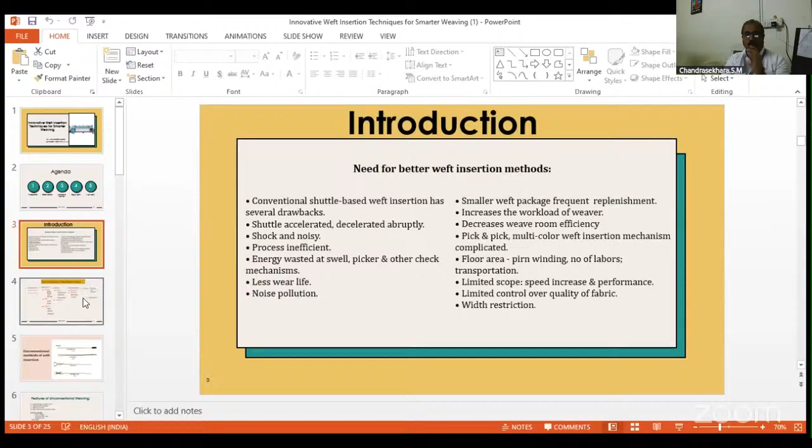So that's why people thought, why can't we design the loom with no shuttle? That idea came to the minds of these scientists, and they came up with a new solution - what is called the shuttleless loom, or the loom with no shuttle. This is the introduction of shuttleless looms into the textile industry. It is a major breakthrough, I tell you.

In the 1950s, with the great effort of the Sulzer brothers of Switzerland, they came out with a new solution called the projectile loom. The projectile loom is the first category introduced into the textile market under the shuttleless concept.

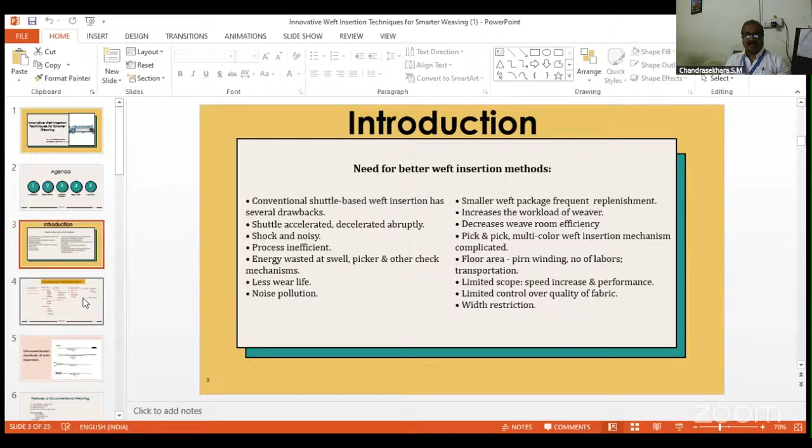Let us go in detail into the shuttleless loom. Before that, I'll go through the classification of shuttleless looms. The first kind of generation loom is the projectile loom, in which the single projectile was first started.

When they started with the single projectile loom, the projectile had to be inserted into the shed, go to the opposite side, leave the weft, and come back to the picking side. This caused great wastage of time, so they introduced multiple projectile looms, using a number of multiple projectiles.

In multiple projectile looms, the number of projectiles is decided by the width of the loom. Likewise, 5, 6, 7, or 8 projectiles are used in multiple projectile looms.

The next category of shuttleless looms are called rapier looms. There is a big classification in the rapier loom. Rapier looms are classified on the basis of number, on the basis of weft, and on the basis of rigidity. On the basis of number, the rapier looms are classified as single rapier.

They first tried with the single rapier, but a lot of time was wasted, so they introduced the double rapier. Then they went for the twin rapier, and then the biphase rapier. I'll discuss these briefly in the next slide.

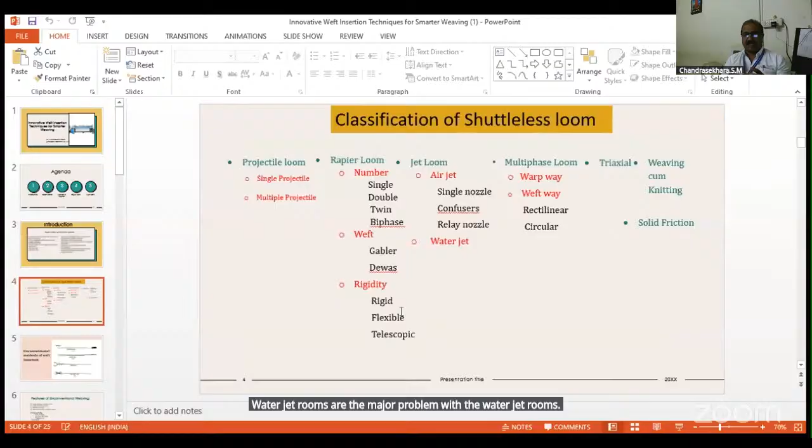Another kind of jet loom is called the water jet loom. The major problem with water jet looms is that they are restricted especially to hydrophobic yarns like polyester, because they are not recommended for cellulosic materials. This is because the whole media is water, so the cloth may absorb water and become wet.

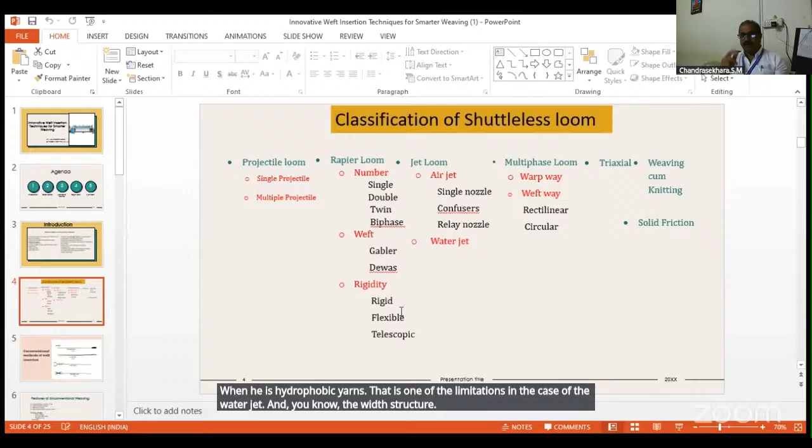That's why water jet looms are restricted to hydrophobic yarns only. That's one limitation in the case of the water jet, along with width restriction. In the case of the air jet loom, first they tried with 230 centimeter wide fabric. Now by introducing confusers, relay nozzles, and multiple jets, they have achieved wider widths in the air jet loom.

Next comes the multi-phase looms. Multi-phase looms are very popular for higher production rate. Believe it or not, multi-phase looms have gone up to a speed of 5,000 meters per minute.

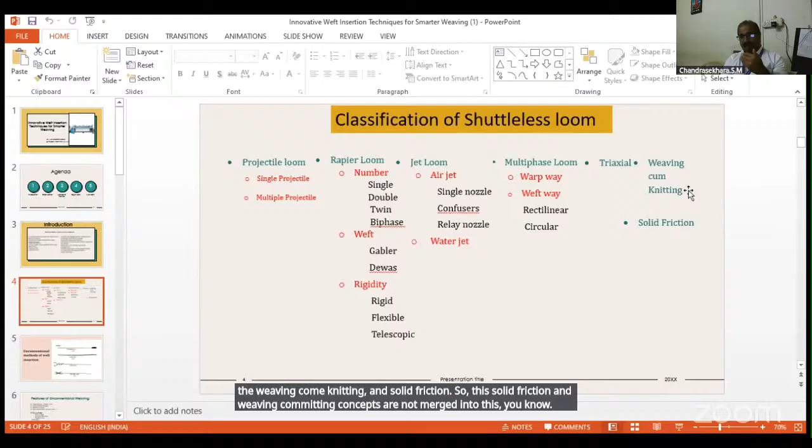The classification is warp way and weft way. In the case of weft way, there are rectilinear and circular kinds of multi-phase looms available. Next comes triaxial, and then weaving cum knitting and solid friction. These solid friction and weaving cum knitting concepts are not much introduced into the market yet; they have yet to be popularized.

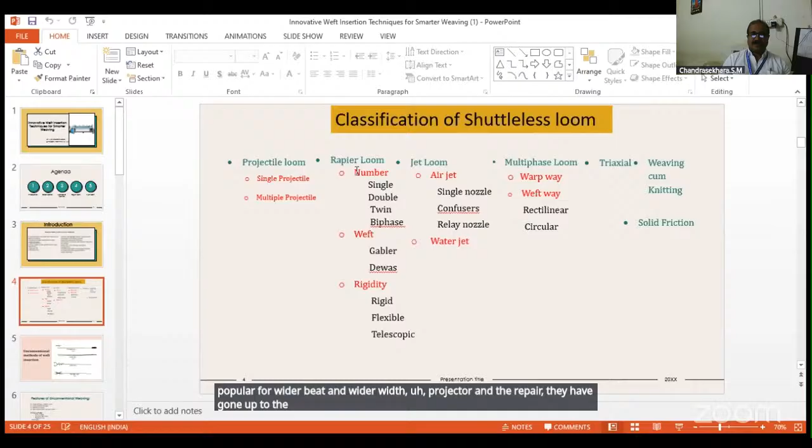But the rest of the shuttleless looms, like projectile and rapier, especially projectile looms, are very popular for wider width. Projectile and rapier have gone up to 5,000 mm, even 5,300 mm wider width cloths are possible using projectile and rapier. So this is the brief classification of shuttleless looms.

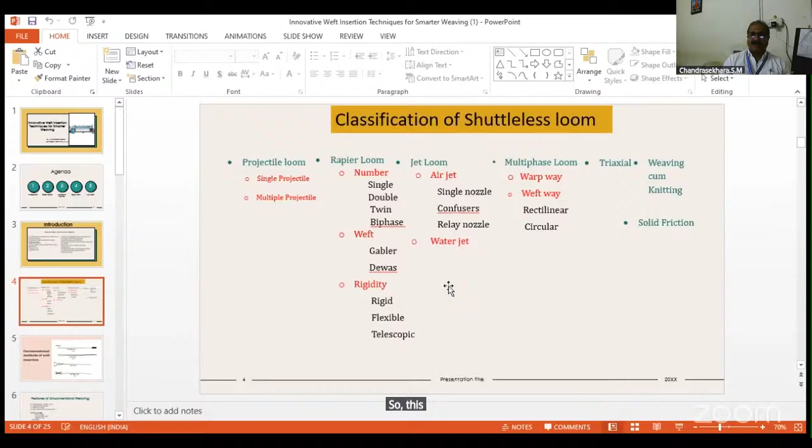There are two methods as mentioned already: one is the loop transfer technique, called the Gabler system, and another is the tip transfer technique, called the Dewas system. Anyway, the transfer takes place at the center of the loom. In the case of the double rapier, this is the beginning of it.

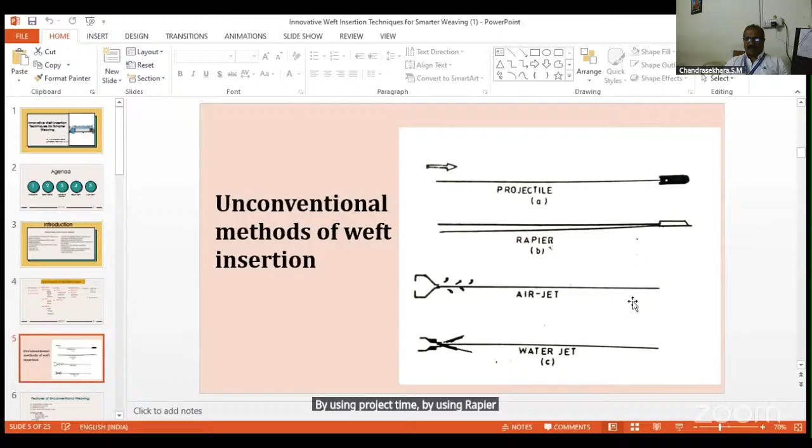Because of all these accessories in the recent edition, they have achieved wider width fabric in the case of the air jet loom. This is what is called the water jet loom, where the pressure created by the jet pump carries the weft yarn across the shed. These four diagrams show the different types of weft insertion methods: using projectile, using rapier, using air jet, and using water jet.

So here I'll just go through this: what are the features of these unconventional weaving machines, and how they differ from the conventional weaving machines.

First, unconventional weaving machines carry a large weft package like the cone or cheese, containing a huge amount of weft yarn, which can supply the weft yarn for quite a long period. The cheeses or cones weigh nearly about 5 kg to 6 kg, so they can continuously supply the weft yarn. That is the advantage, the important feature of unconventional weaving machines.

Next one is unconventional selvage.

As in the case of the conventional selvage, we have continuous weft insertion by the shuttle. The loop kind of selvages are formed in the conventional one, whereas in the case of unconventional selvages, there are different types: tuck-in selvages, leno selvages, fused selvages, melt selvages.

Different types of selvages are made very attractive near the edges. Manufacturers can go for monogramming, blend composition details, or company names printed on the selvage. Such beautiful, attractive selvages are formed on recent unconventional shuttle-less looms. Next is the weft accumulator.

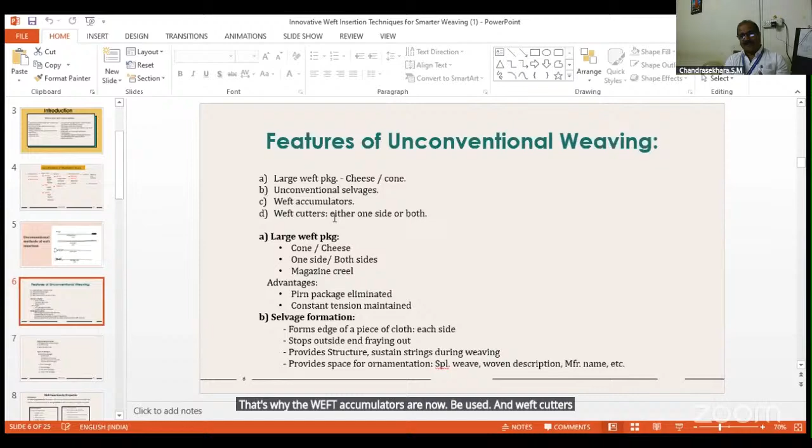Weft cutters are sometimes provided at both sides of the loom, or at one side. So these are the important features of the unconventional weaving machine.

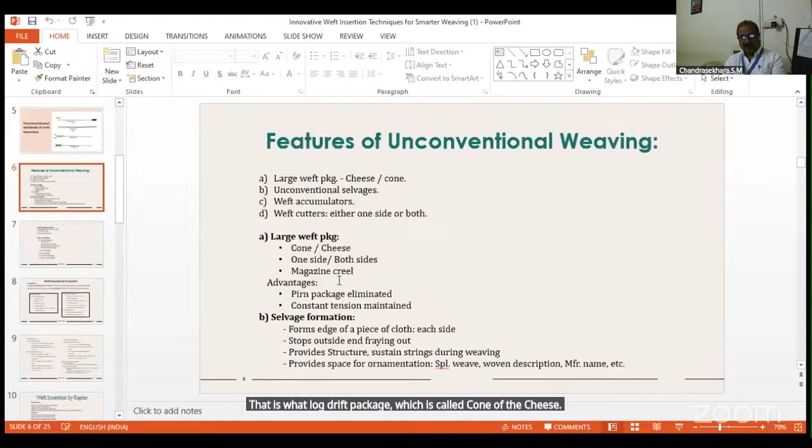That is, the large weft package called cone or cheese, sometimes provided on one side or both sides. They are also provided with a magazine creel, where each package position is duplicated. Thereby the weft can be supplied for hours, shifts, or even days together by using the magazine creel. That's the advantage of the large weft supply package like cone or cheese.

And the whole pirn-winding department is eliminated. The people required for pirn winding, the machinery, transportation, and chances of weft mixing are all completely eliminated. This way you can increase efficiency and get good quality fabric, because when the pirn is exhausted and changed, there are chances of variation in pick density due to the change of weft pirn.

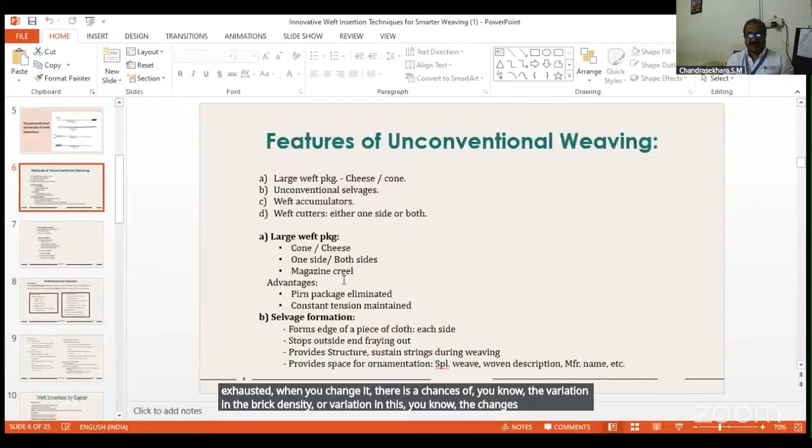So that's what I've just mentioned. Constant tension is maintained because of the weft accumulators, and very attractive selvages are formed using modern unconventional shuttle-less looms.

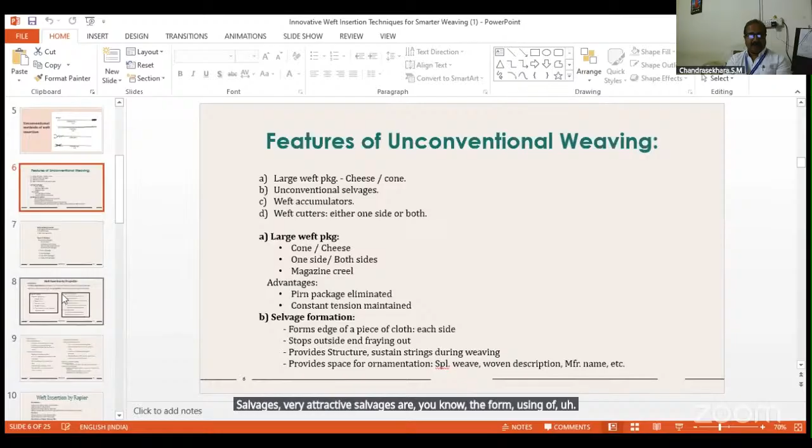I'll move on to projectile looms. The projectile looms were introduced into the market by Sulzer Brothers in the year 1953, in Switzerland. The projectile looms revolutionized the weft insertion technique completely, using a projectile to insert the weft yarn through the warp shed.

In the case of projectile looms, just imagine the projectile dimension is 90 mm. What we have to observe is that the shuttle, weighing more than half a kg and used to carry just a few milligrams of weft, is reduced to a projectile weighing 40 grams. Where the shuttle is almost one foot in length, the projectile is reduced to 90 mm.

The width of the projectile is also 14 mm and the thickness is 6 mm. By observing these dimensions, to a greater extent the projectile size is reduced compared to the conventional shuttle. Because of this reduced weight, the projectile is able to pass through the shed with greater velocity.

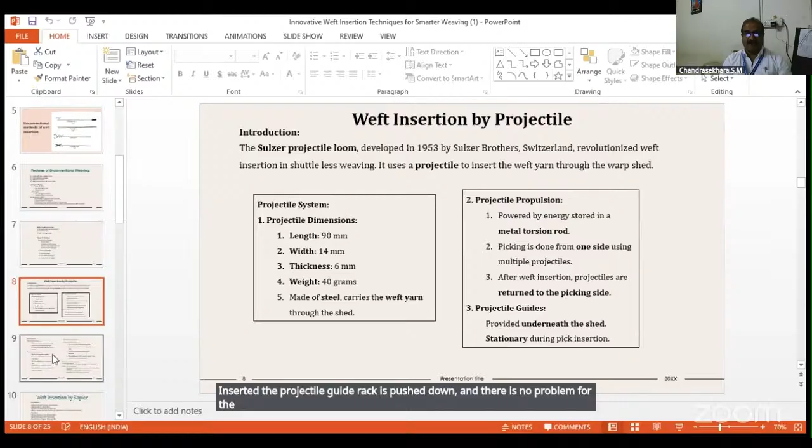Once the pick is inserted, the projectile guide rack is pushed down, and there is no problem for the beat-up mechanism. So in the case of the projectile loom, let's go through the weft insertion mechanism.

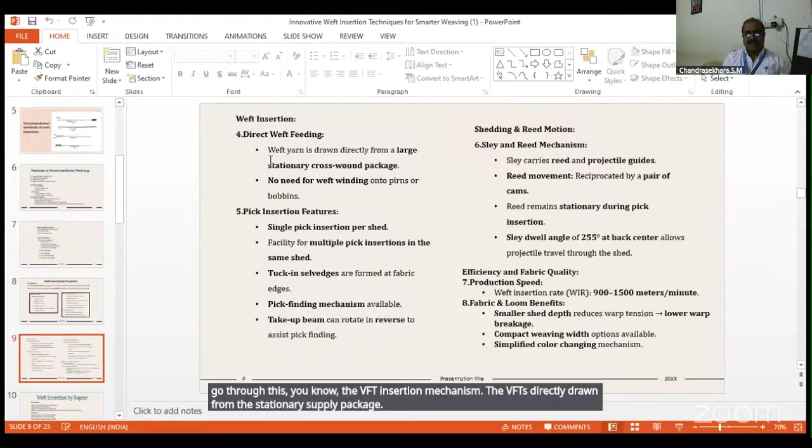The weft is directly drawn from the stationary supply package and introduced into the shed, with no question of any department required here. Directly the cones or the cheeses are used as the weft supply package. It may use a single pick, or multiple projectiles, and facility for multiple picks in the same shed is also possible.

Tuck-in selvages: please understand, projectile looms are very popular, especially for making tuck-in selvages. Let's see how these tuck-in selvages are formed.

When the weft is inserted at both sides, a small amount of weft is protruded, say 10mm on this side and 10mm on that side. That extra weft which is introduced is held by the tuck-in needles and introduced into the shed when the next shed is open. Strong, neat, attractive selvages are formed using this tuck-in concept.

Another feature of this projectile loom is the pick finding mechanism. If there is any fault in the weft, any fault in the pick, the loom is allowed to run back one or two picks. You can repair it and then run the loom. That is what is called the pick finding mechanism.

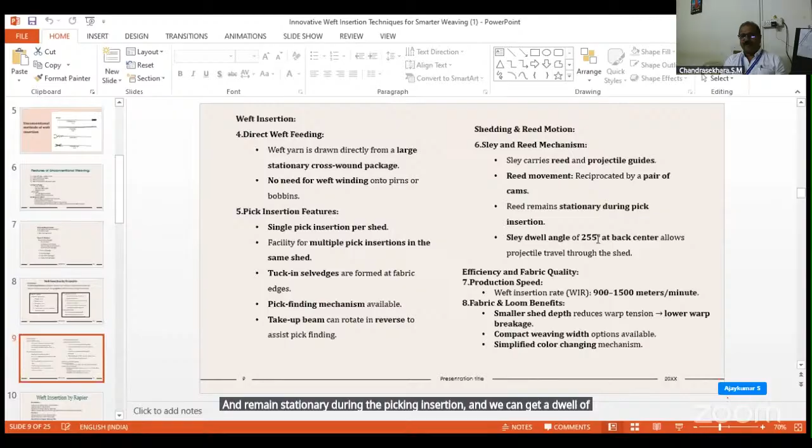The reed is reciprocated by a pair of cams across the complete width, and the reed remains stationary during the pick insertion. We can get a dwell of 255 degrees at the back center, so we get a lot of dwell period at the back center of the loom.

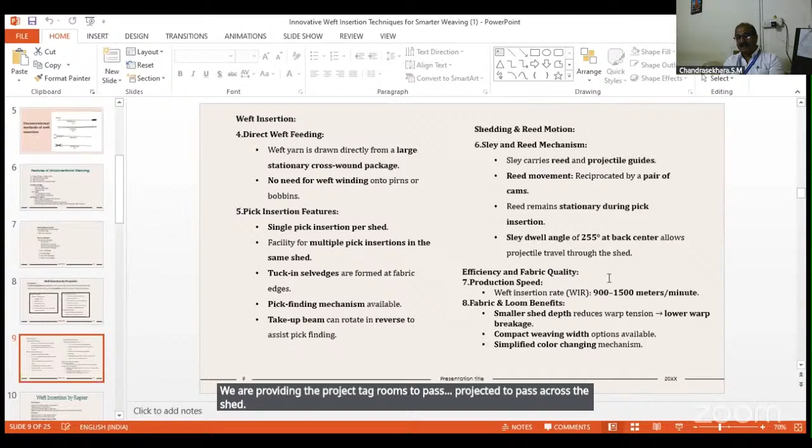That means we are providing the projectile time to pass across the shed. Greater time is given for the projectile, which is why greater picks per minute are possible. We can design the reed according to our requirement, so we can get 255 degrees dwell at the back center.

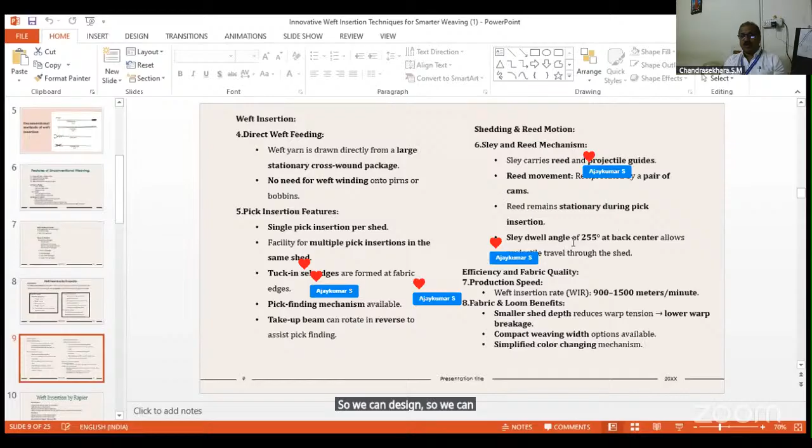Production speed: the weft insertion rate is 900 to 1500 meters per minute. So a greater weft insertion rate is available, and this additionally increases the efficiency and production.

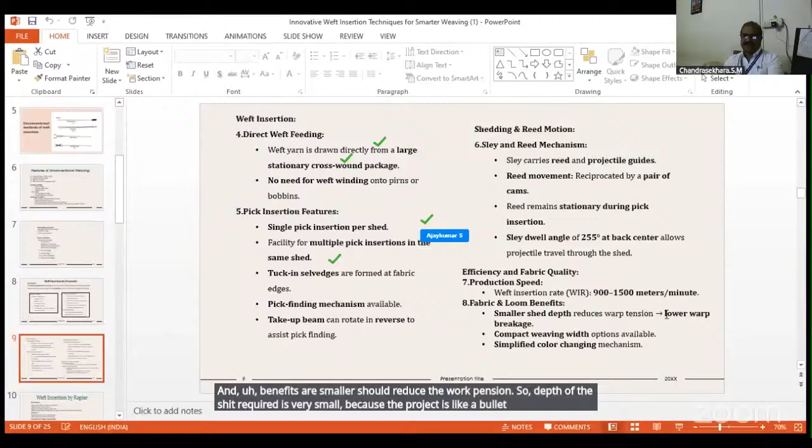Benefits include smaller shed depth, which reduces the warp tension. The depth of shed required is very small because the projectile is like a bullet which carries the weft yarn across the shed, so it does not require any heavy shedding mechanism.

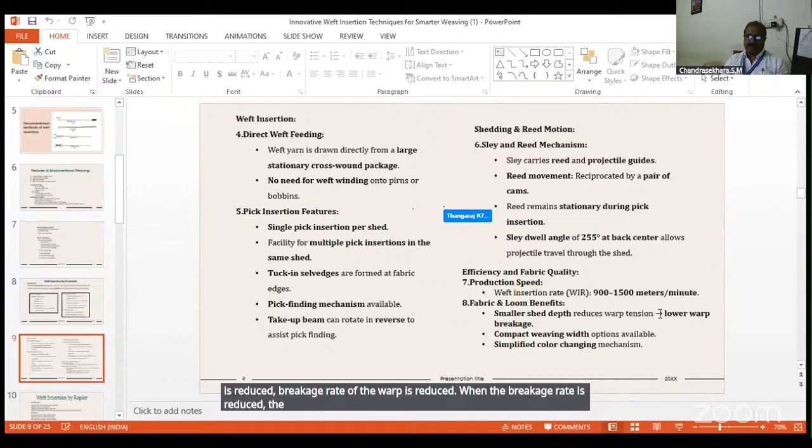That's why the strain on the warp is reduced. When the strain on the warp is reduced, breakage rate of the warp is reduced. When the breakage rate is reduced, stoppages of the loom are reduced. When stoppages of the loom are reduced, weave room efficiency is increased, and the reduced breakage rate leads to good quality cloth.

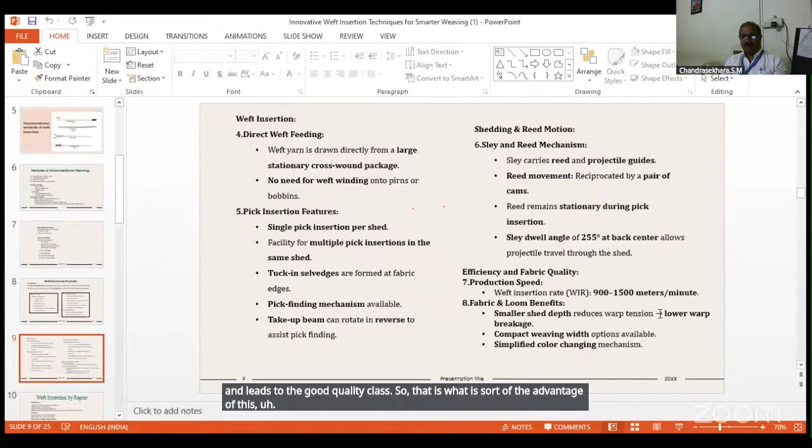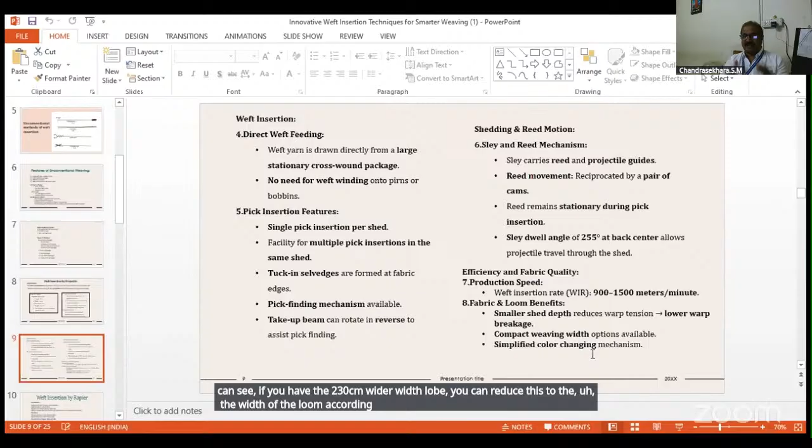So that is the advantage of this projectile loom - compact weaving width options are possible. If you have a 230 centimeter wide loom, you can reduce the width of the loom according to requirement. That facility is available; that is one advantage.

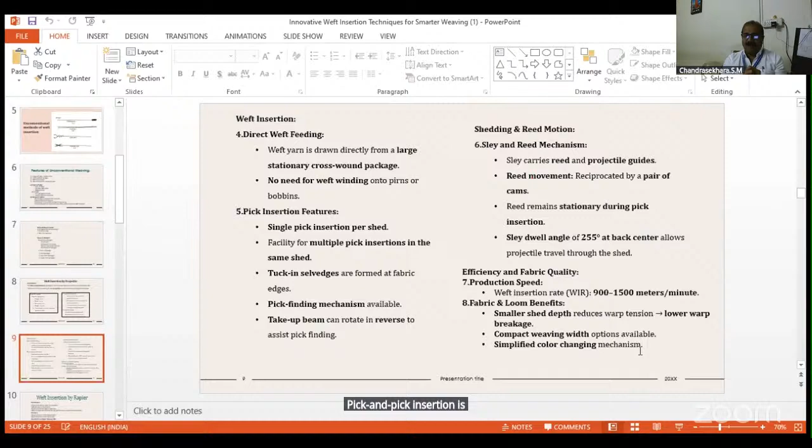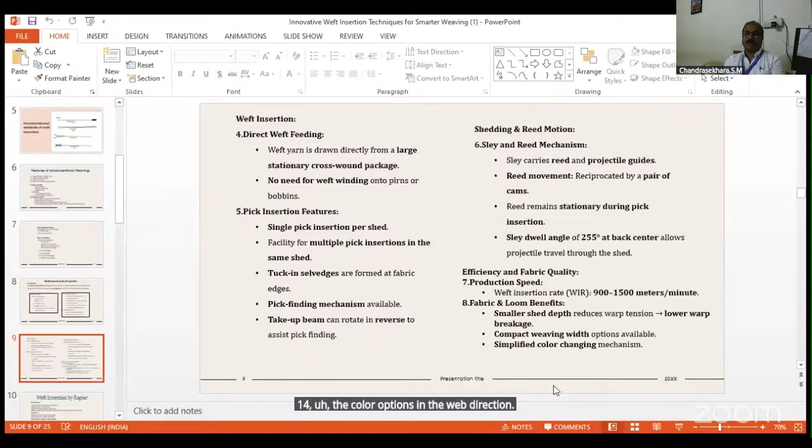Simplified color changing mechanism - I mentioned this when comparing with shuttle looms. There, the picking mechanism and color changing mechanism, that is pick and pick insertion, is more complicated in the conventional loom, but here it is very simplified. In recent machines, people have gone for 12 to 14 color options in the weft direction. That's the advantage of using the projectile loom.

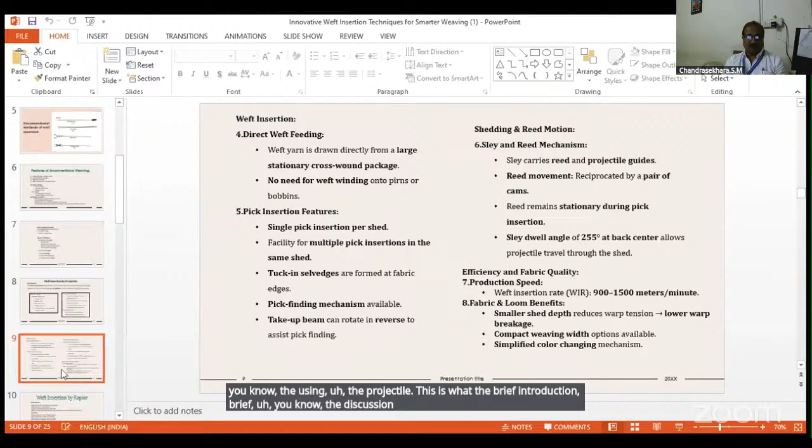This is the brief introduction and discussion on the projectile looms. My humble request to all participants is whenever you have any doubt or want to ask something, please ask me. I can answer your queries, or else I'll go through the next slide.

Here, the weft is secured in a slat or stick, manufactured using carbon material. The weft is caught by the rapier, and rapiers may be flexible tapes or rigid rods, depending on the type used. They are made up of coated steel reinforced with high performance man-made fibers like carbon.

Inventor Mr. John Gabler in 1922 introduced the concept of loop transfer, and Raymond Dewas in 1939 introduced the tip transfer technique. Compared to the loop transfer technique, the tip transfer technique is popular and easier to transfer the weft yarn.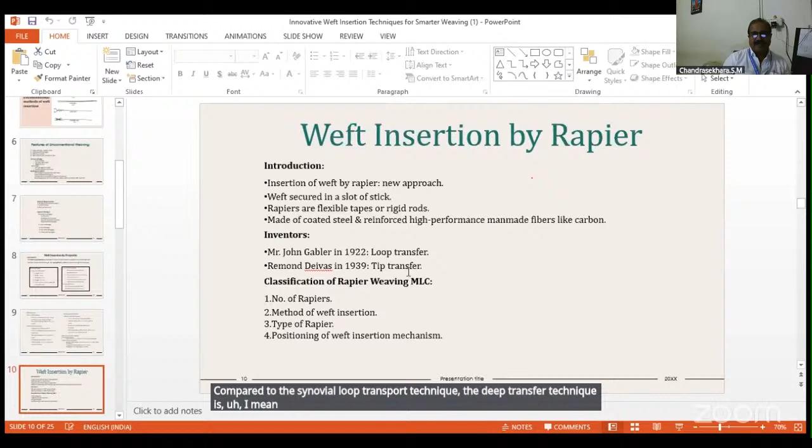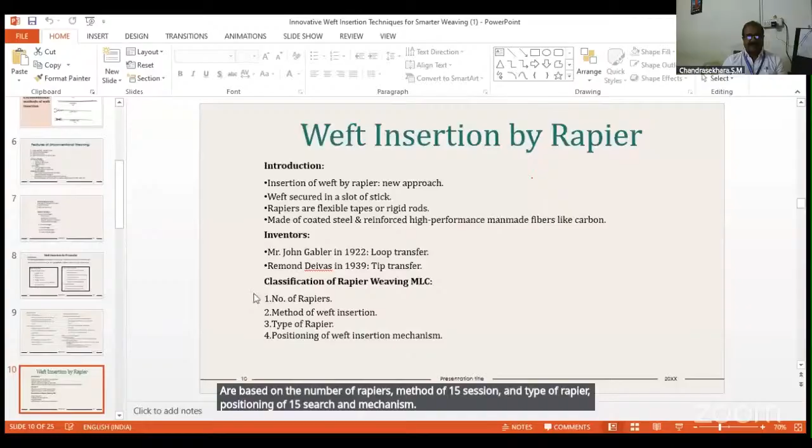I've already mentioned that the classification of rapier weaving machines is based on the number of rapiers, method of weft insertion, type of rapier, and positioning of the weft insertion mechanism. I've already given this classification, so I'll just give the brief features of all kinds of rapier looms.

You can see increased weft insertion rate of 1,400 meters per minute, and speeds have gone up to 900 rpm. In the case of the conventional shuttle loom, people find it difficult to achieve 200 to 230 rpm. When they tried to go beyond 300 rpm, they used to get a lot of vibrations on the loom - that's the biggest problem with the conventional shuttle.

Just imagine 1,400 meters per minute weft insertion rate and speed of 900 rpm - it's amazing. See that the width of the cloth can be 5,400mm. In the present context, people are trying to produce three cloths at a time on the same loom - that's the beauty of these unconventional looms: less noisy, less wear and tear.

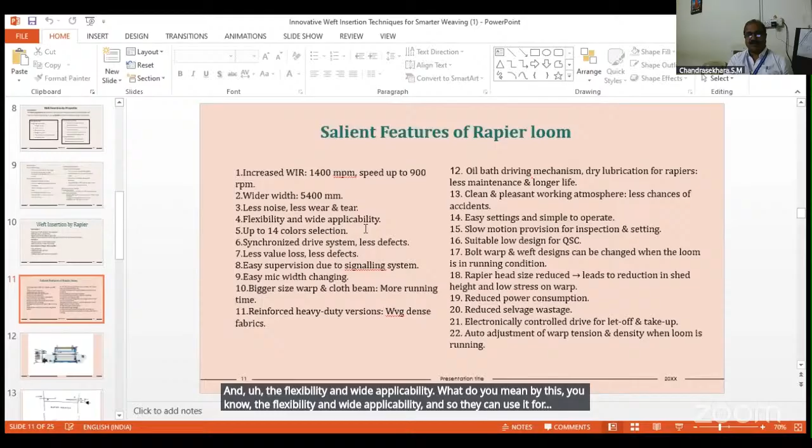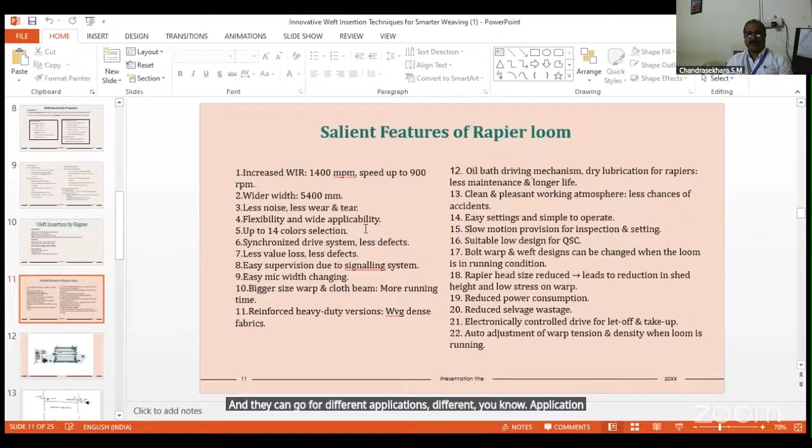Flexibility and wide applicability - what do you mean by this? They can use it for different types and varieties of yarns, and they can go for different applications. The fabric can be produced on the loom. So these rapier looms are used to produce fabric for different applications.

You see they can go up to 14 colors easily - color options of up to 14 colors - and synchronized driving system. This is one of the attractive points.

Synchronized driving system means the shedding mechanism, picking mechanism, beat up, let off, and take up mechanisms are all synchronized. Because of this synchronization, they can run smoothly without any defects, and they can achieve higher production. These are all the possibilities in the case of rapier looms.

It is possible to produce fewer defects. Because of fewer defects, there is less value loss, so they can make more profit - that's the advantage of using the rapier loom.

Easy supervision due to signaling system - the signaling system is made especially for the weavers, and signaling lights are available.

So the particular defect, the light will be illuminated, so that particular problem will be rectified, and the weaver can attend to that problem. That is one attractive point of using the signaling system in the case of all kinds of the recent looms. And easy machine width changing.

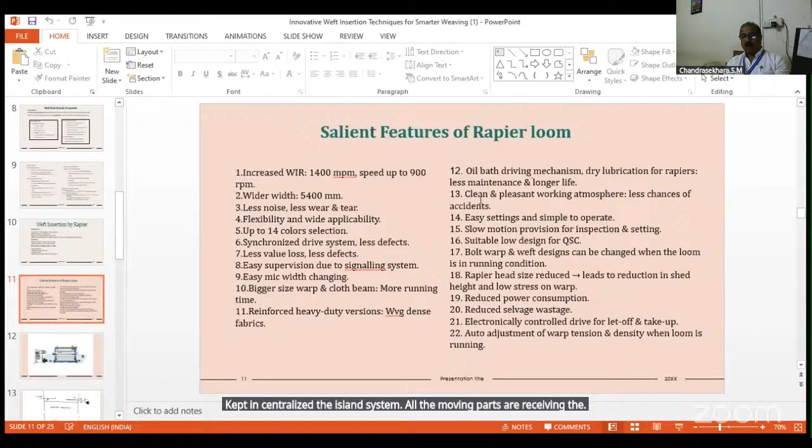The whole driving system mechanism is kept in a centralized oiling system. All the moving parts receive lubricating oil automatically. So there's no need for frequent oiling, and the hands of the operators don't get dirty and soil the fabric. That kind of problem is completely solved.

And dry lubrication for rapiers, meaning the use of graphite dry lubrication - the rapiers are lubricated, less maintenance, and longer life, so the machine can have a longer life.

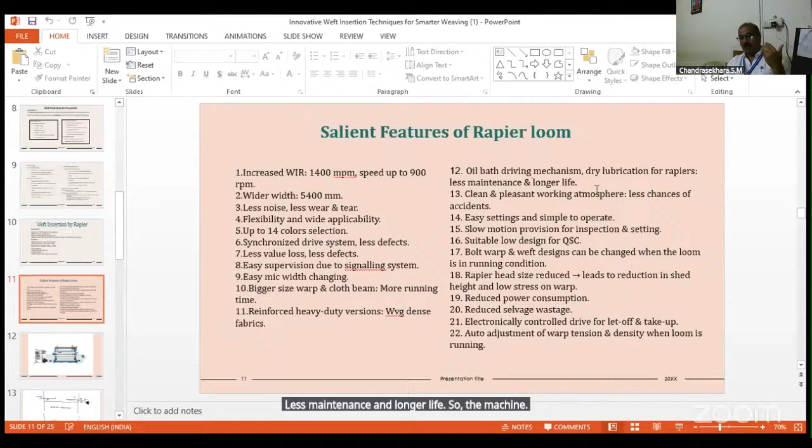So I think one point, when I mentioned in the first slide, the wear life of the loom parts is less in the case of the conventional loom. If you compare the lifespan of the looms, rapier and projectile looms last longer.

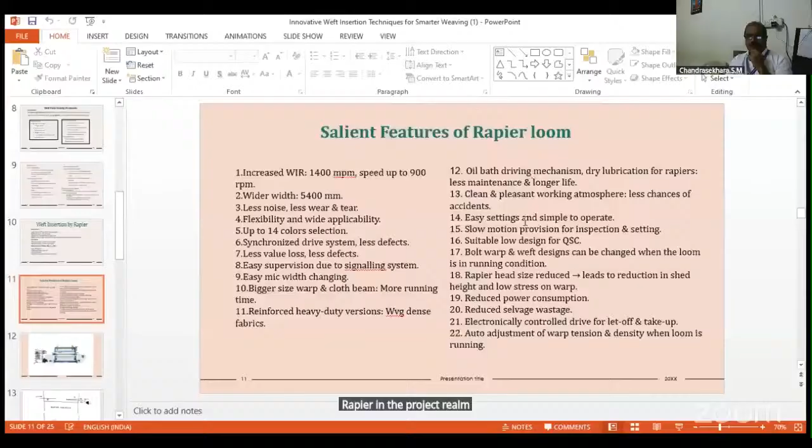More clean and pleasant working atmosphere. I mean to say, the working atmosphere is very pleasant, there is no noise, so the worker can comfortably work in the weaving shed. Clean and pleasant atmosphere - another advantage.

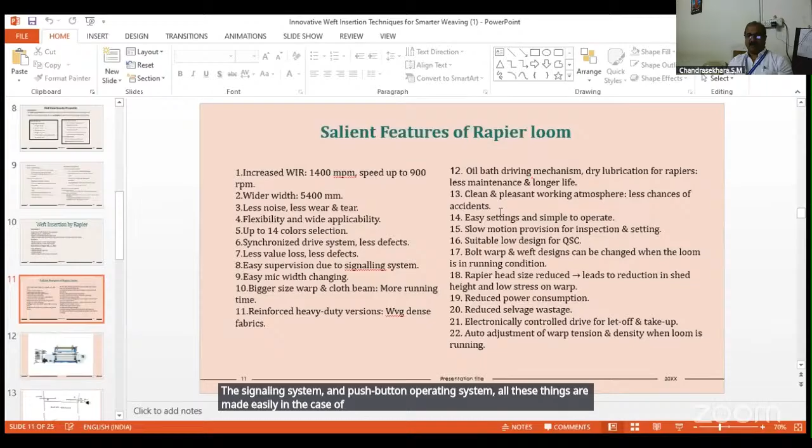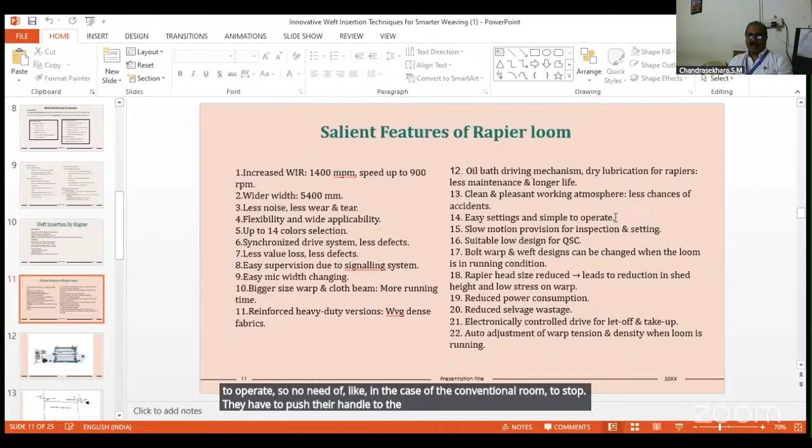Less chances of accidents because the signaling system and push button operating system are made available easily in the case of the recent loom. It is easy setting and simple to operate. So there's no need, like in the conventional loom, to push the handle to the off position to stop, and push the starting handle to the on position to start. That problem is completely ruled out in the case of the rapier and the projectile.

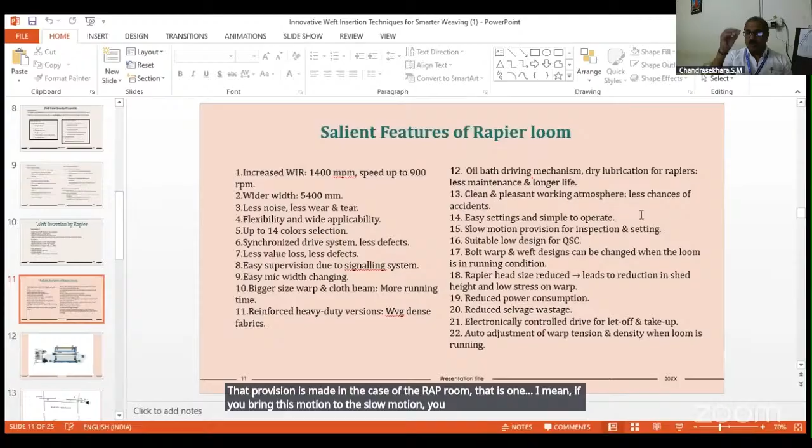Slow motion for inspection and setting - that provision is made in the case of the rapier loom. If you bring the machine to slow motion, you can visualize and inspect the defects, or make small repairs when the loom is running. That's the advantage of the slow motion provision in the rapier loom.

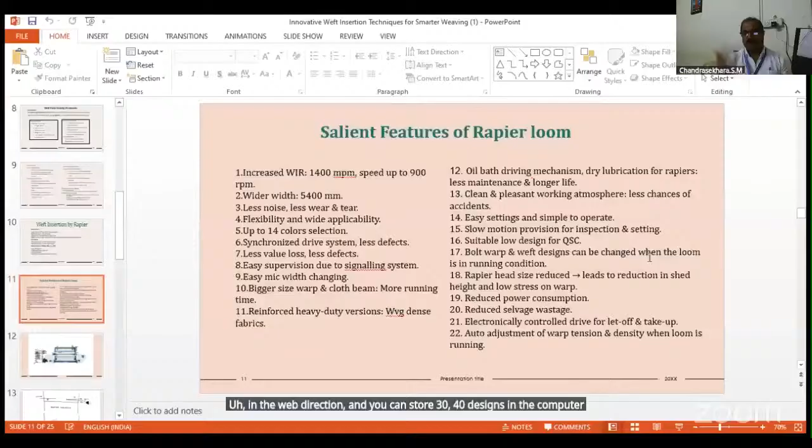Suitable for quick style changes - it is a big advantage. Both warp and weft designs can be changed when the loom is running. The loom is attached to a small computer, and all the data is stored in this computer. Whenever you want, you can change the designs in the weft direction, and you can store 30-40 designs in the computer, or a number of designs according to the capacity of the machine and the computer. So you can change the designs.

The rapier's size - there is a reduction in size, reduced power consumption, and reduced selvage waste, electronically controlled drive for let-off and take-up mechanism. So on this point again, let me take one more minute here.

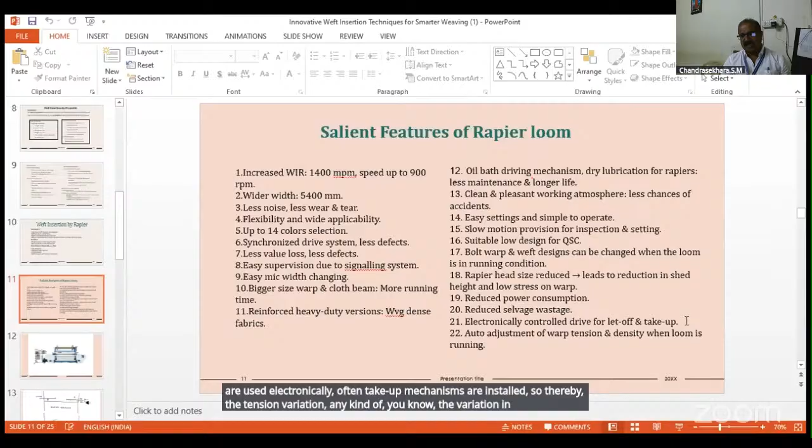Here servo motors are used, electronic let-off and take-up mechanisms are installed. So any variation in the tension in the let-off mechanism is identified, and in the meantime the tension is regulated, and the required amount of warp is suddenly released to the weaving area. Same case with the take-up mechanism also. This leads to less breakage of warp and less variation of pick density in the take-up mechanism. That's why you can reduce defects in the fabric.

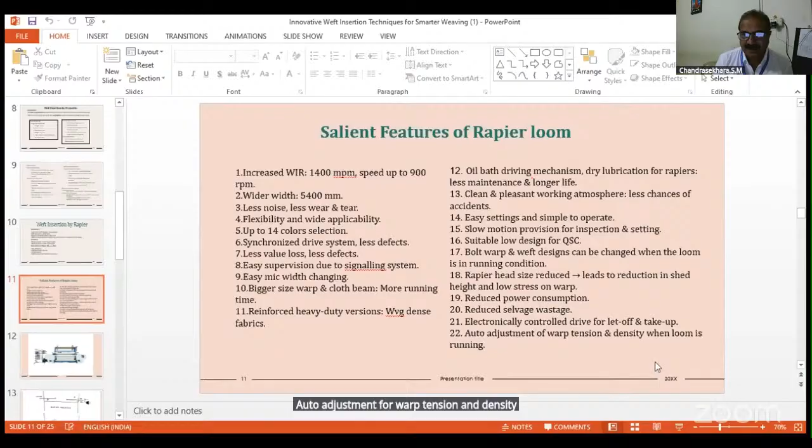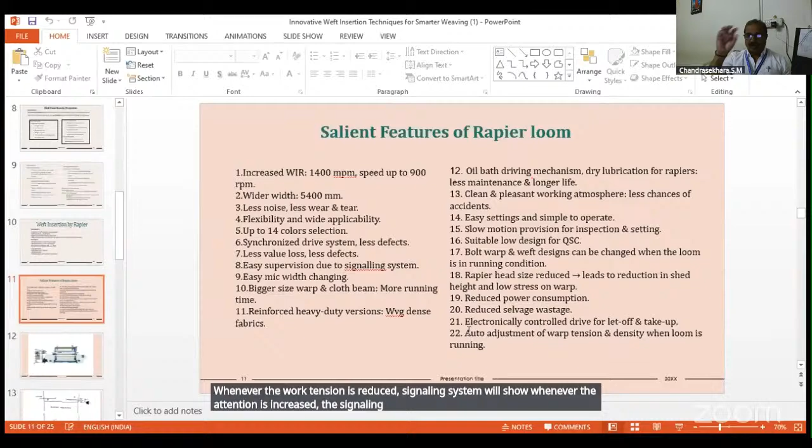Auto adjustment for warp tension and density is available when the loom is running. You can adjust the tension of the warp. Whenever the warp tension is reduced, the signaling system will show it. Whenever the tension is increased, the signaling system will show that the tension is high, so the operator can adjust it accordingly. These provisions are available.

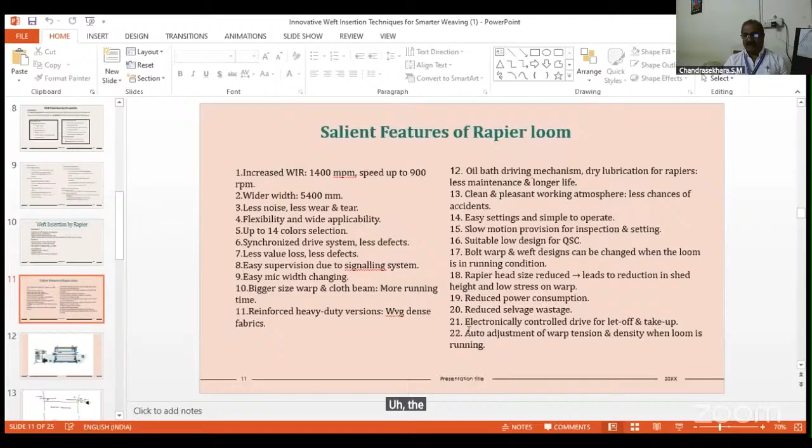These photographs show the weft insertion technique on the rapier loom. You can see the creel, which is available to keep the supply packages. This depends upon the capacity of the machine - they have up to 14 colors or 14 cones or cheeses provided here. This is what is called the accumulators, which can store the required amount of weft, and then the weft is collected by the rapiers and introduced into the shed.

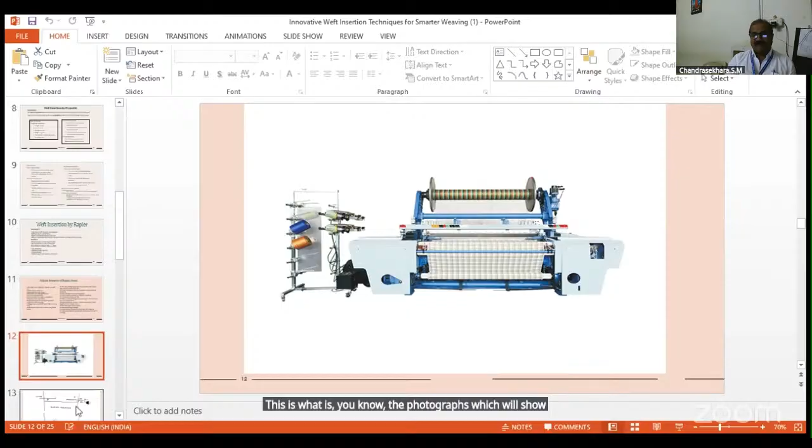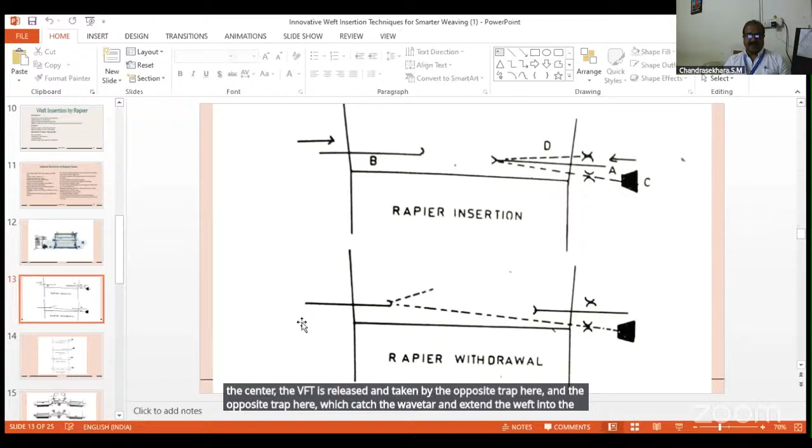These photographs show the weft insertion, and here is a small symbolic representation of how the rapier looms work. This is the rapier insertion - you can see one rapier and another rapier coming from the opposite side, and this is the weft yarn. When they meet at the center, the weft is released and taken by the opposite rapier, which catches the weft yarn and extends it into the next half of the shed. This is weft insertion by double rapiers.

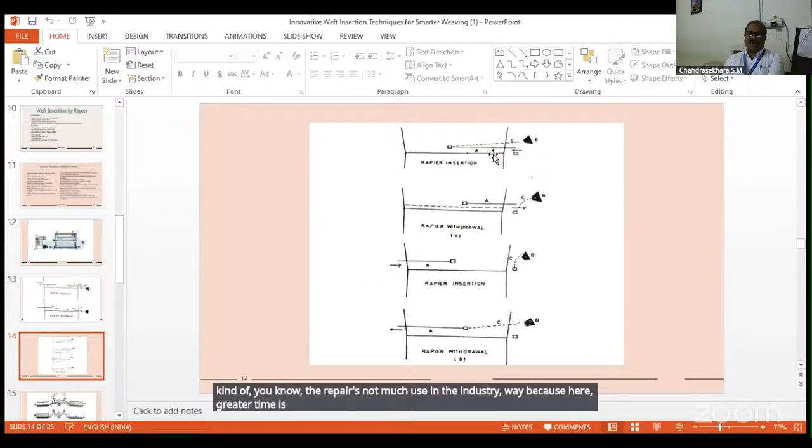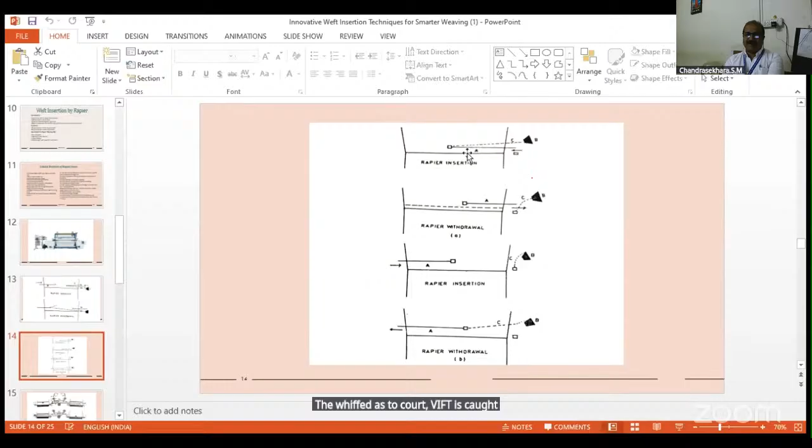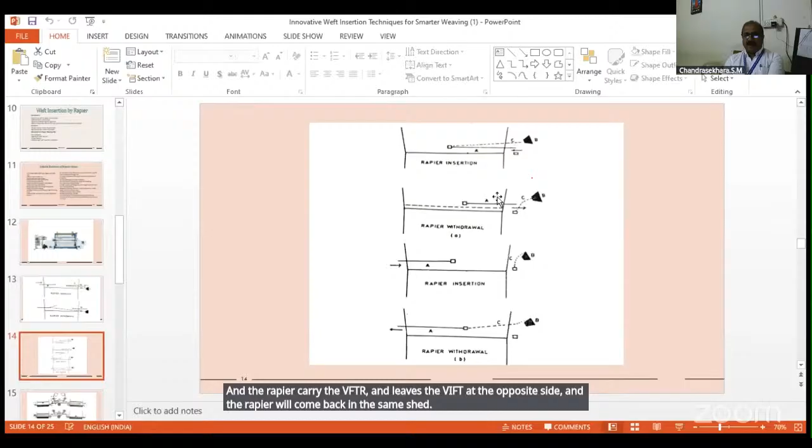This kind of rapier is not much used in the industry, because greater time is wasted in the case of the single rapier weft insertion system. Here the weft is caught in the slot of the rapier stick, and the rapier carries the weft yarn and leaves it at the opposite side, and the rapier comes back in the same shed. In the next case, you can see the rapier comes from the opposite side.

This is the supply package, the cone, and this is the rapier which comes from the opposite side of the loom, collects the weft yarn, and draws the weft through the rest of the shed. This is the same principle, but the rapier is at the opposite side here. In the previous case, the rapier is at the same side where the cone or package is provided.

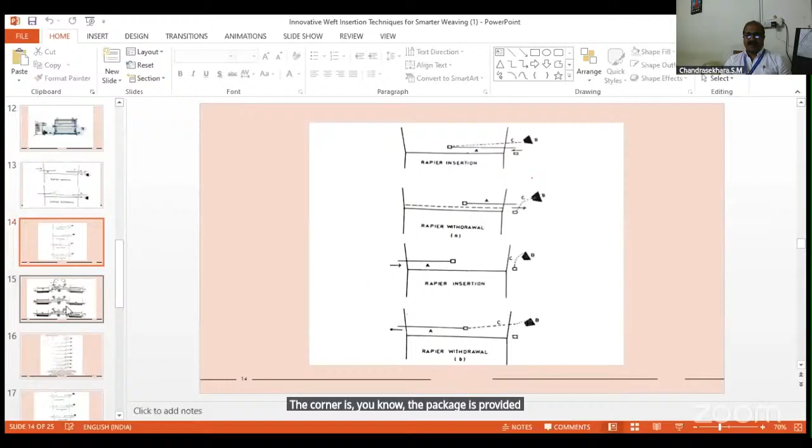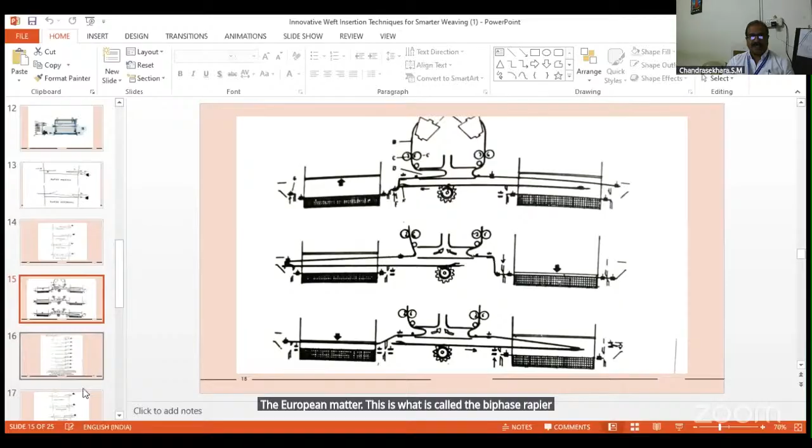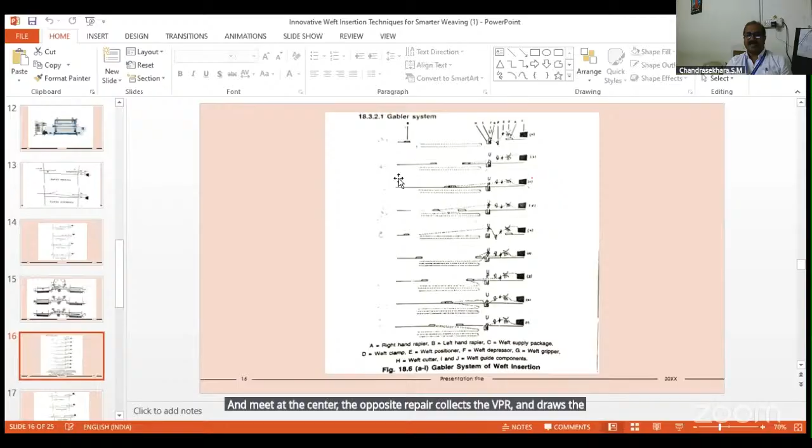I'll move to the next one - this is the gabler system of the rapier, which explains the loop transfer technique. The photos may be too small to see clearly, but imagine this is the loop transfer technique. This is the picking side, and this is the off side of the loom, where the rapier is coming, moving to the center, and from this side another rapier is collecting the weft yarn, meeting at the center. The opposite rapier collects the weft yarn and draws it into the rest of the shed. These stages are explained in 8 steps. This is what is called the gabler system of the rapier technique.

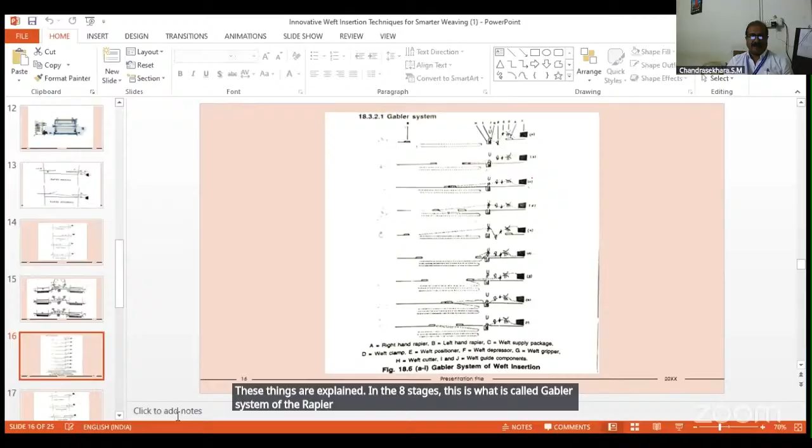I'll move to weft insertion by air jet. In the present context, many manufacturers are going for air jet weft insertion. Why? Because the major advantage is the higher weft insertion rate.

As I mentioned, they have gone up to 2000 meters per minute. As with the air jet loom, after the projectile and rapier looms, the next generation looms are the air jet looms, which fall into the shuttleless loom category. They were introduced into the market in the early 70s.

A wide range of fabrics can be produced by air jet looms, with higher weft insertion rate of 2000 meters per minute. Earlier they started with a single jet, which had a width restriction of 150 centimeters. Later, using confusors and relay nozzles with multiple nozzles, they achieved widths of 400 to 500 centimeters.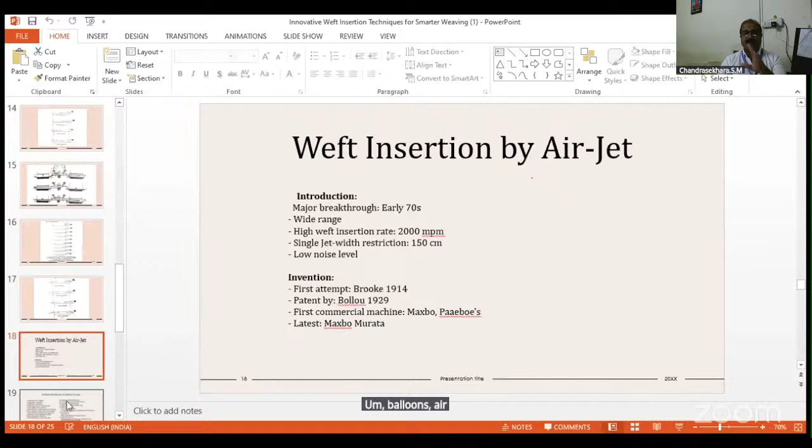In the year 1914 itself, Brooke attempted this. In 1929, it was patented by Bollou, and later the Maxbo Murata company introduced air jet looms into the market. People still call it the Murata air jet loom, because Maxbo Murata was the company which commercially released air jet looms into the market. That's why they are called Maxbo Murata jet looms.

Now I'll go through the salient features of the air jet loom. Reed space is maximum 400 centimeters. Speed of the loom is 750 rpm. A very attractive feature is the weft insertion rate of 1600 to 2000 meters per minute, and shedding can be done by crank, cam, dobby, or jacquard.

This makes it possible to produce wider varieties of cloth, except heavyweight fabrics. The depth of the shed is very small because it doesn't require heavy shedding devices, since there's no question of carrying devices in air jet looms. That's what makes it very attractive.

The depth of the shed is very less. When the depth of the shed is less, the strain on the warp is less. When the strain on the warp is less, the breakage rate is low. When the breakage rate is low, the production rate is high, defects are less, and there is good production. This increases the efficiency, making it very advantageous for the market and companies.

Weft insertion is done using single or multiple jet confusers and a measuring system. The measuring system measures the amount of weft required for each pick. Accumulators store the weft in advance for each pick, and feeders are available to feed the weft to the jet point.

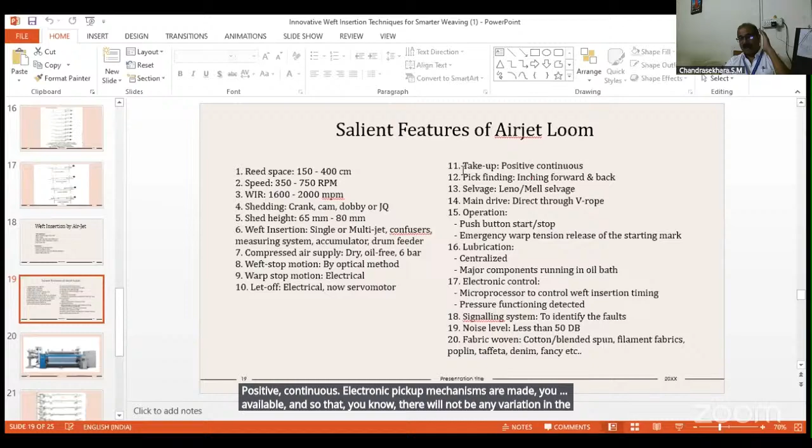Positive continuous electronic take-up mechanisms are available so that there will not be any variation in pick spacing or pick density. Whatever pick spacing and density is expected is possible because of this mechanism. A pick finding device is also available, allowing inching forward and backward using a pick finding mechanism.

That is the greatness of the air jet loom. Leno, more popularly Mell selvages, are more useful in the case of the air jet loom. The whole driving system is through a V-rope, making it smooth running, with push button start and stop.

Another attractive point is emergency warp tension release to avoid starting marks. You can compare this to the shuttle loom, where whenever you start the loom, stop it, repair it, and restart, there are chances of starting marks appearing. That problem is completely rectified here, and a centralized lubrication system continuously supplies oil to all working areas so the loom runs smoothly.

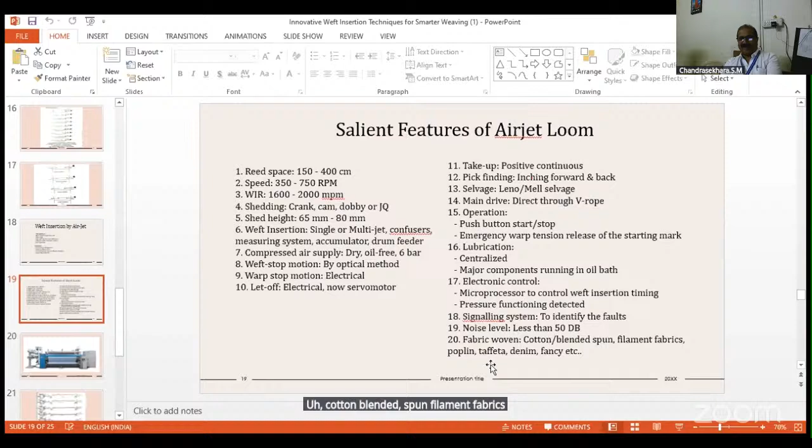This makes it possible to achieve very low noise. Major components run in a centralized oil bath with electronic control, microprocessor control for weft insertion timing and pressure function detection, and cramper opening and closing using a microprocessor signaling system to identify faults. Noise level is less than 50 decibels, making a pleasant atmosphere. Fabrics woven using air jet looms include cotton blended, spun, filament fabrics, poplin, taffeta, denim, fancy, etc.

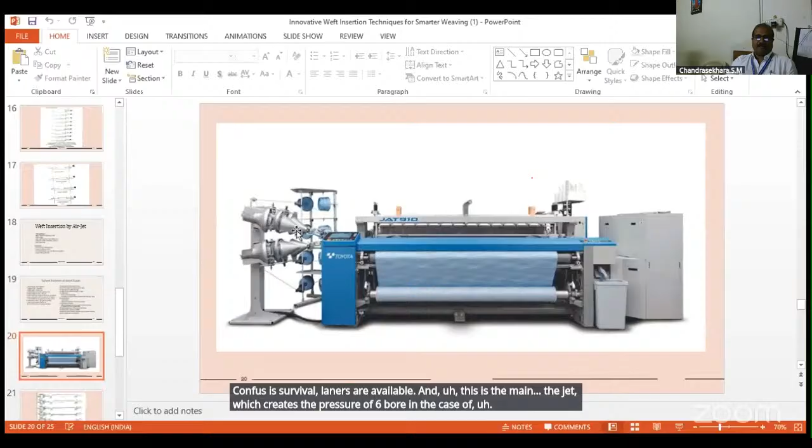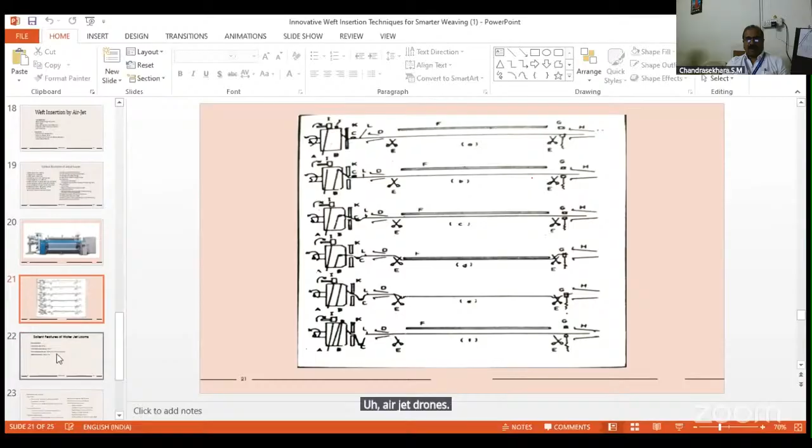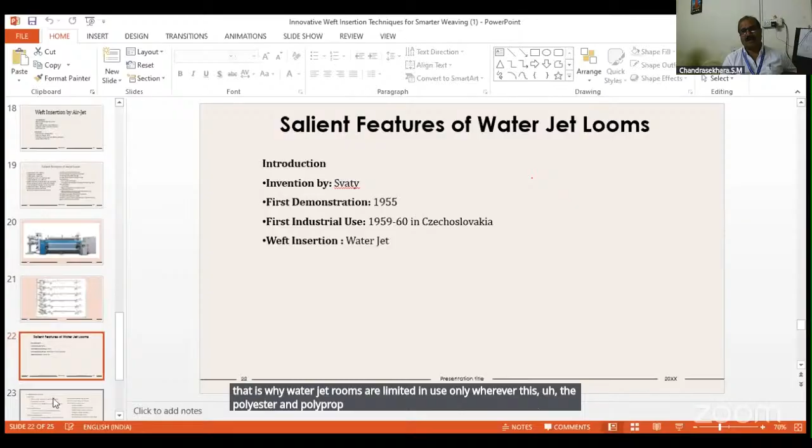This is the biggest limitation of water jet looms: they are not recommended for cellulosic material and are restricted only to pure synthetics. There's also a width restriction compared to the air jet loom. That's why water jet looms are limited to use only where polyester and polypropylene fabrics are woven; water jet looms are recommended there.

I'll quickly go through the requirements for successful weaving on the water jet loom. Warp and weft yarns must be water insensitive, meaning they must be hydrophobic in nature. They should not absorb water, and even if sized, they should be sized using synthetic sizes only. They are recommended only for polyester, nylon, etc.

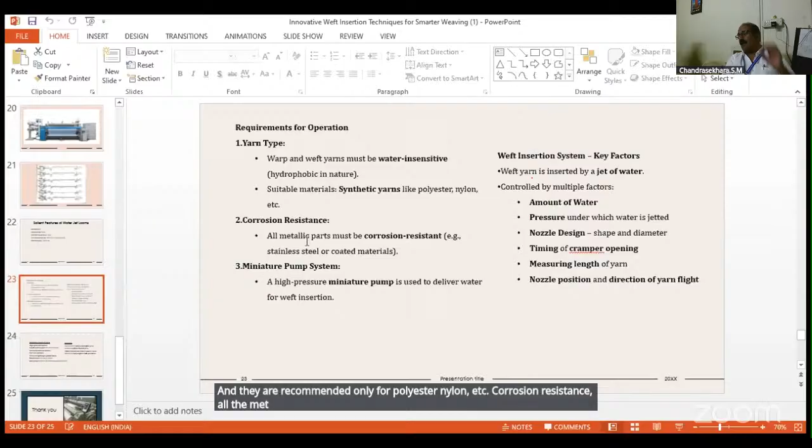Corrosion resistance is required - all metallic parts and loom parts should be completely corrosion resistant, for example stainless steel or coated materials. This increases the cost of the loom because all parts must be corrosion resistant or made of stainless steel.

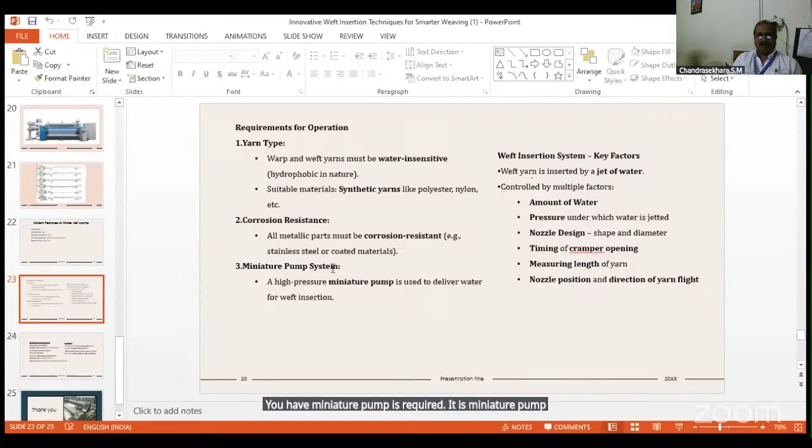A miniature pump is required to pump the water, and the main important thing here is the whole process of weft insertion system. In the water jet loom, it is based on the amount of water and the pressure under which the water is jetted.

It is the design of the nozzle, timing of cramper opening and closing the nozzle, and measuring length of the yarn. Nozzle position and direction of the yarn flight will decide the weft insertion methods and technique.

The air jet loom requires a compressor, the water jet loom requires a miniature pump, and here it requires a demineralized plant.

Why demineralized? If minerals like calcium and magnesium are left in the water used for weft insertion, they cause corrosion of the nozzle and may obstruct the movement of the weft yarn. That is why a demineralized plant is required, and a pH of 7 is recommended, and all loom parts should be corrosion resistant.

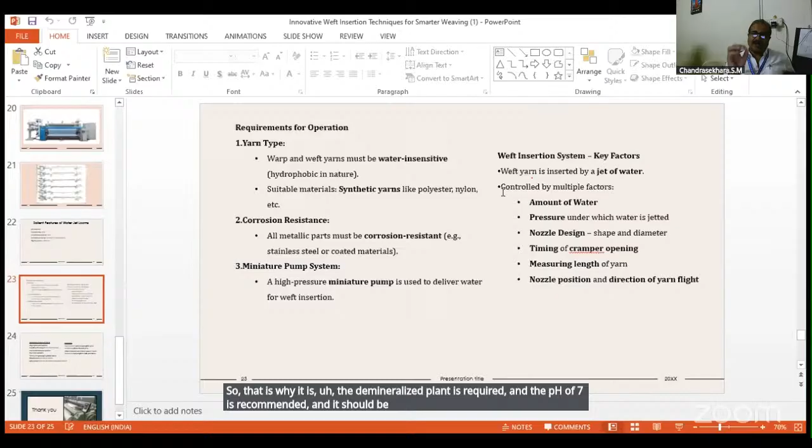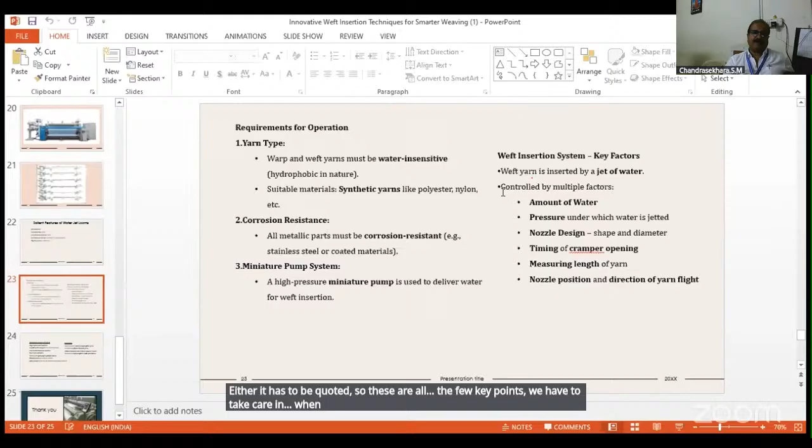Either it has to be coated. So these are the few key points we have to take care of when we weave with this kind of water jet loom. This is all in my presentation.

And if there are any things you wanted to share, please ask me regarding my presentation.

Hello. Hello, sir. Yes. Yes, sir.

Hello, sir. Yes, sir. This is the complete presentation on the topic of shuttleless looms. Okay sir, thank you sir. Then, is there any queries, sir, please, from the participants?

Okay, then let's conclude. Thank you, sir, for your resourceful presentation on innovative weft insertion techniques for smarter weaving. And now I would like to invite the Honorary Secretary, IEI Salem Local Center, to propose vote of thanks.

Please, ma'am. Thank you, sir. Am I audible, sir? Yes, ma'am. Yes.